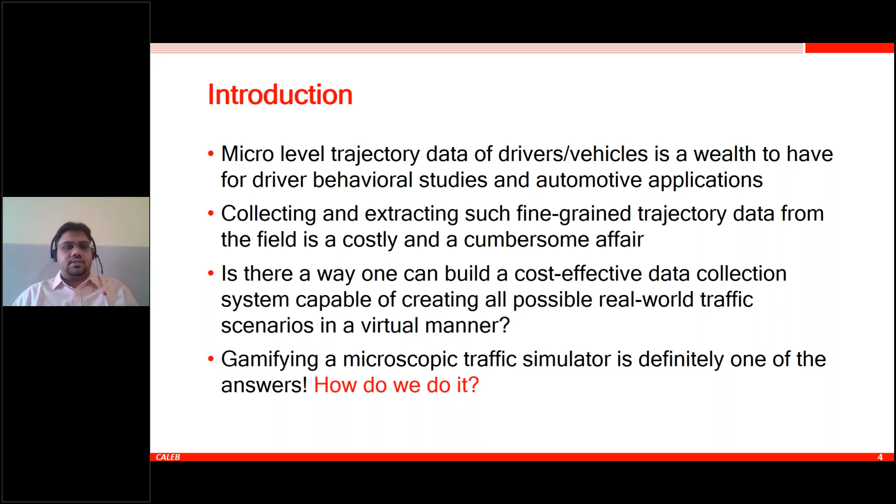For example, in our case today, we are specifically talking about PTV Vissim, which is a good traffic simulator that can represent most of the traffic scenarios in various regions. So with this as the introduction, let me now get into the core part of it. So the basic idea is simple.

When we have a traffic simulator like PTV Vissim, most of the time you can run the simulations, test out various traffic management strategies and signal control strategies, and then come to an understanding of how good those management strategies are.

But the point here is, when an external driver would like to jump into the traffic simulation that we are running, that is not an option that we normally have. But if we want to have the driver in the loop, then we need an interface that can toggle the information, or have the information exchange between the driver and the simulation environment that we are running.

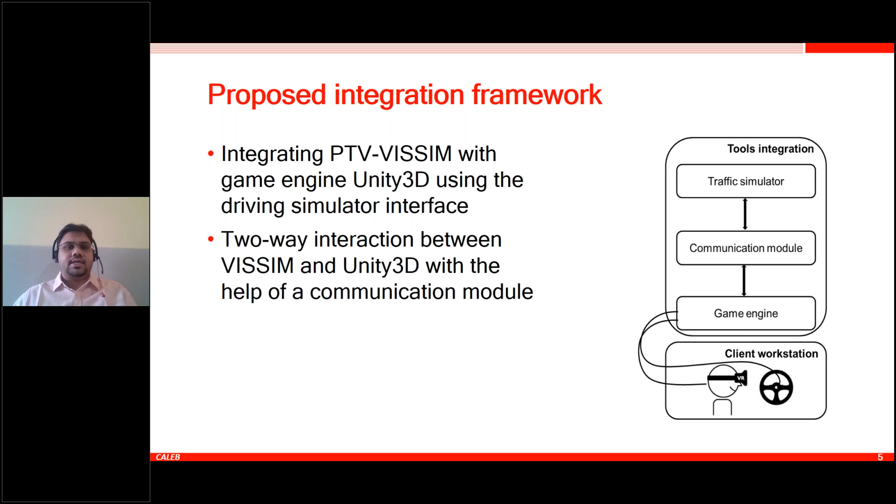Going to the more fine-grained implementation details, this is exactly what we do. We have VISSIM, which is the microscopic traffic simulator. We start VISSIM, and if VISSIM is running, we import the layout that has been created in VISSIM. The layout could be the roadways that you have put in the simulation model you built, the traffic signals you have created, and all the static and dynamic elements that you see on the roadway.

Then we take that layout and create the same layout in the game engine Unity3D. Then we have the external vehicle, which is the driver who is external to the simulation environment. We send that vehicle data, which is external to the VISSIM traffic simulator, to VISSIM. This data is combined with the traffic data already being generated in VISSIM. Then we take both pieces of information and adjust the vehicles as per the data we got from both the Unity game engine and the VISSIM traffic simulator.

Then we have the user input given by the driver who is driving using such a platform. We take that road user's input, update the user's vehicle position, and take that information to VISSIM. Similarly, the information on vehicles controlled by the VISSIM simulator can be taken and put into Unity. So in essence, this flowchart says there is an information exchange happening between the game engine and the VISSIM traffic simulator.

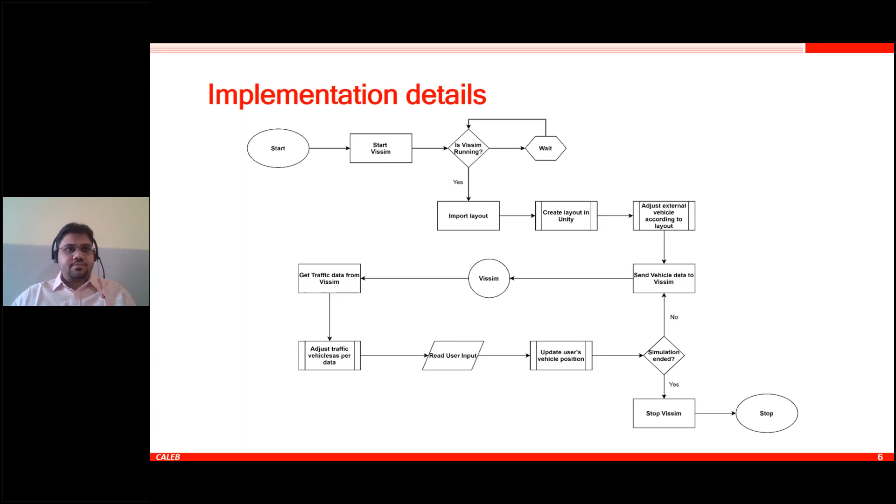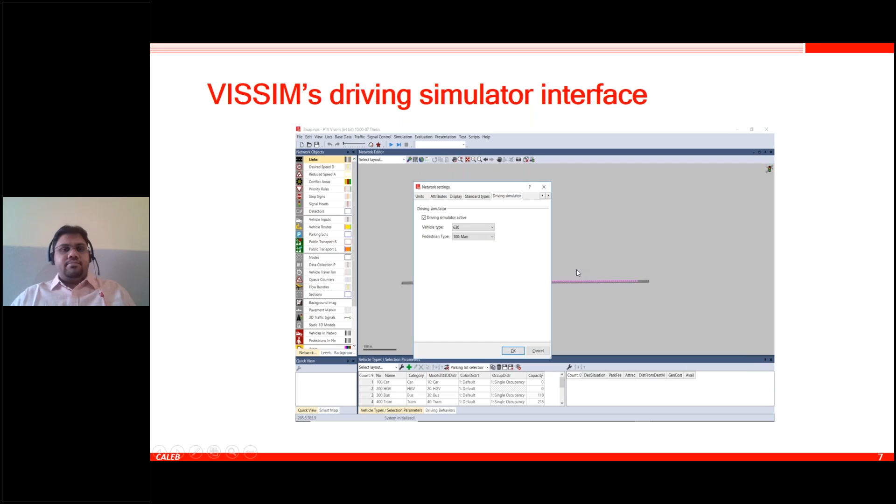Going into further details, this is where you can see how to enable the driving simulator interface. You need to go to the network settings and enable "driving simulator active". After that, what I'm showing here are some pieces of code that we have written in Unity using C#, trying to interact with Vissim's driving simulator DLL. That is what this piece of code is showing.

It is basically trying to connect Unity with Vissim's driving simulator DLL that is already available. And if people would like to know how this can be done, in some of the Vissim example files you will be able to see how this can be done.

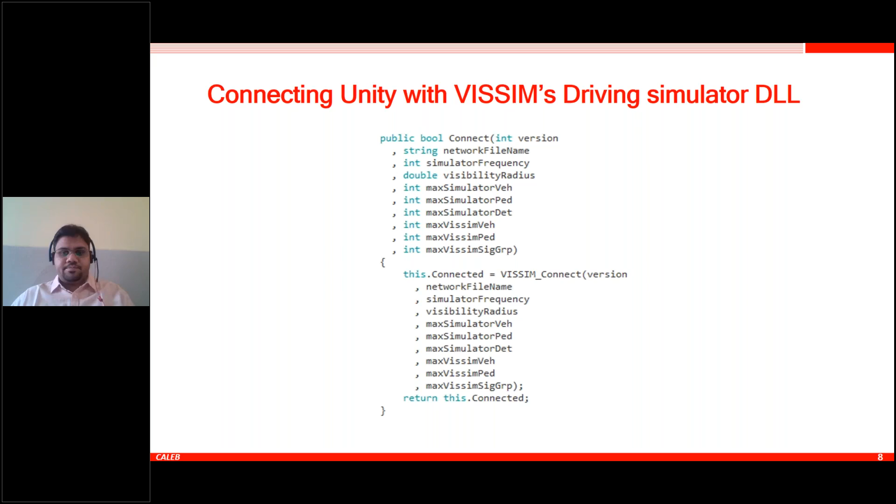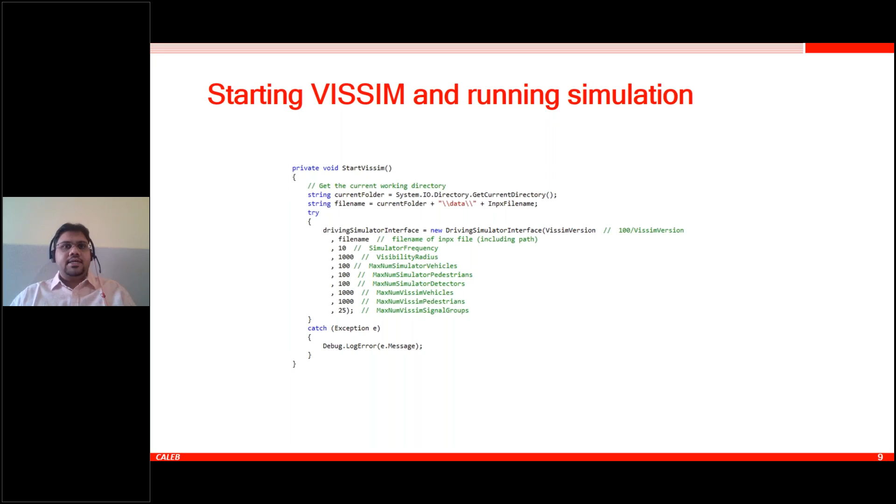Then the second step is, once we have established the connection between Vissim and the Unity game engine, then we need to really start Vissim and then start running the simulation. So this piece of code is basically saying here how to start Vissim. Basically, that involves going to the traffic simulation model that we have built, which will be an INPX file that would normally get created out of Vissim when we are building a model, and then take that into account and then start running the simulation.

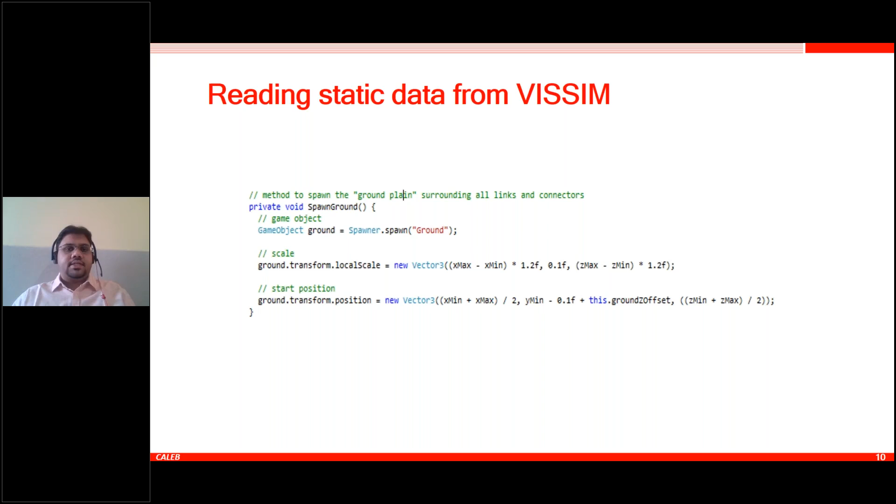Then the second part of it is basically, as I already told, we need to read the static data from Vissim. So this is where you will be able to see how we can translate the elements that we have created in Vissim as 3D objects in Unity. So it will basically spawn different objects that we have created in the simulator, and then it will be showing up in the Unity 3D interface that we are going to show to the external driver.

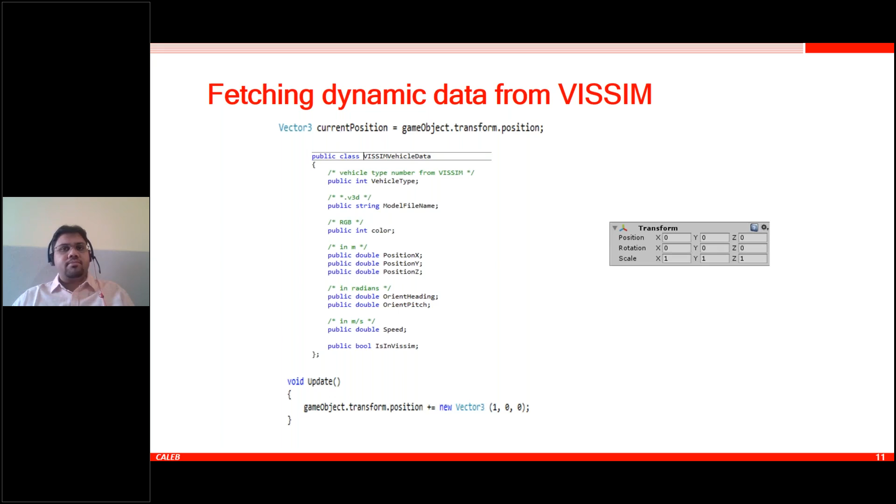Then similarly, as much as static data is important, dynamic data is also very important, in terms of the road surface, the road texture, in terms of the vehicle's positions, and so on and so forth. So this is what I'm showing here on the right side. Normally the positions of the vehicle and the rotation and the scale at which we are projecting these objects can also be taken from the Vissim simulator, and then it can be shown in the game engine.

Then we have a very important part where we want to translate the client's actions, whatever he or she is doing using the Unity interface, and then read that as the input and then take that input back to the Vissim simulator. This is important because at the end of the day, both these pieces of software or the tools have to talk to each other and then get information promptly and correctly, so that there is no mismatch between the environment that we are showing in the Unity interface and the environment that is being simulated by Vissim. Both should be in unison.

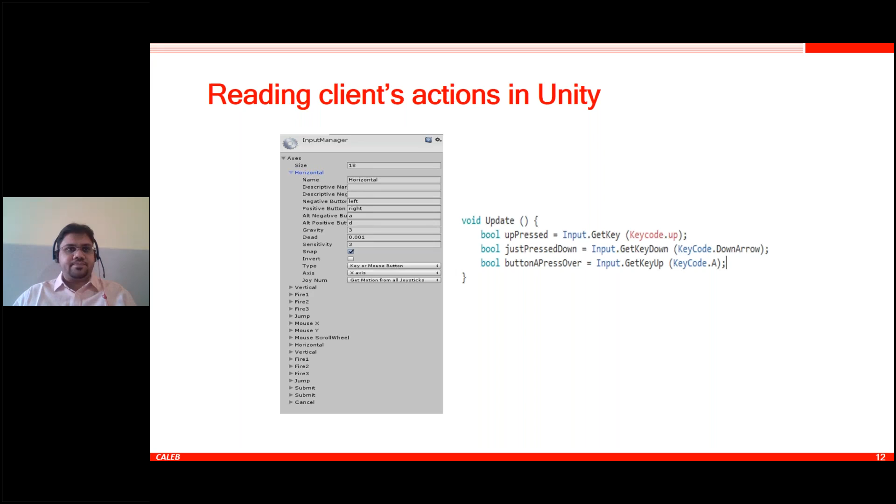Then this is what exactly I was talking about. This two-way communication module that we had to build between Vissim and Unity is the heart of this whole project, I would say, which basically is trying to, again, I'm reiterating the fact that the data has to be exchanged promptly and correctly between both the pieces of the software. And that is where this driving simulator interface would really help us to make this exchange of information happen for us. It can include the vehicle data.

If you are seeing here in the piece of the code, you can see the vehicle data being transferred between both the software tools. Then it will also exchange the pedestrian data. Then the signal data or the state of the signals can also be exchanged between both the tools.

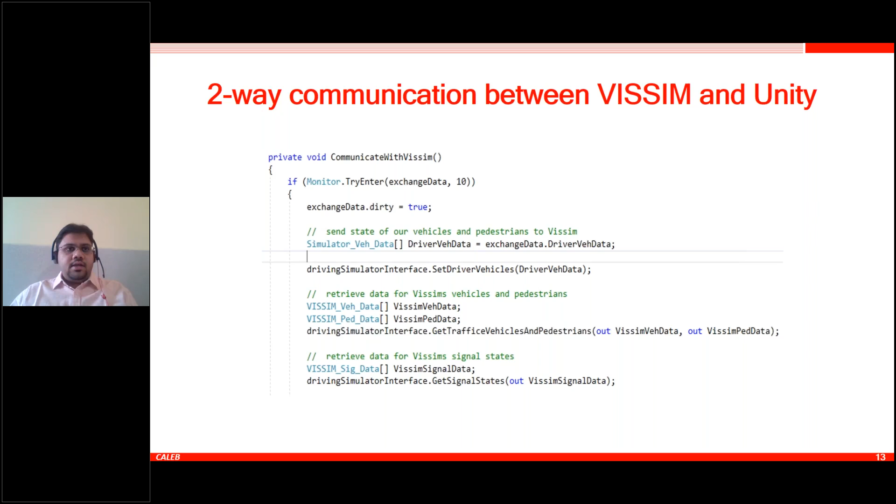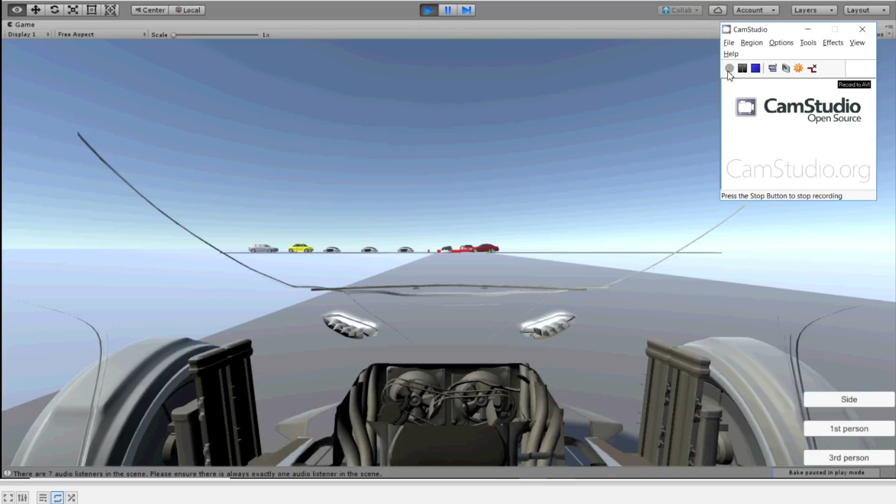Let me know if you are able to see the video. Yes, it's showing now. Yes.

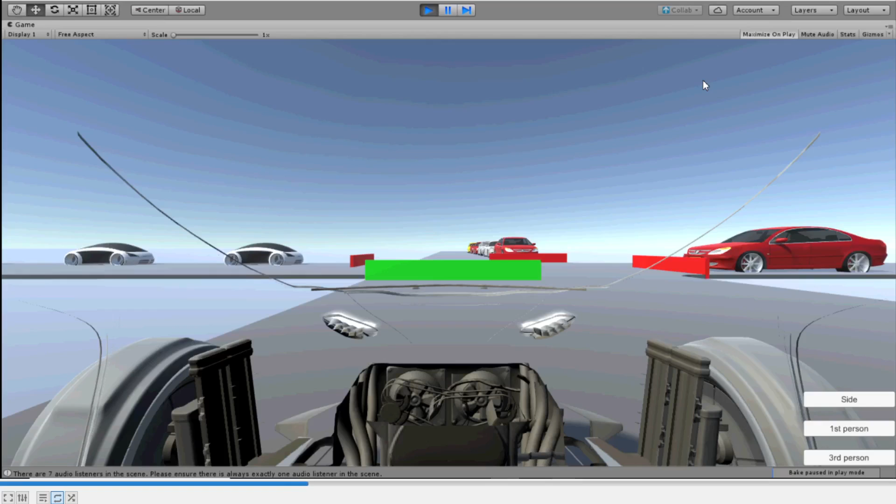Yeah, this is how the vehicle is moving. This is the external driver vehicle that is moving. And this is how you are seeing the vehicles in VISSIM. And then again, I'm coming back to Unity 3D, where there is a vehicle movement that is happening by the external driver.

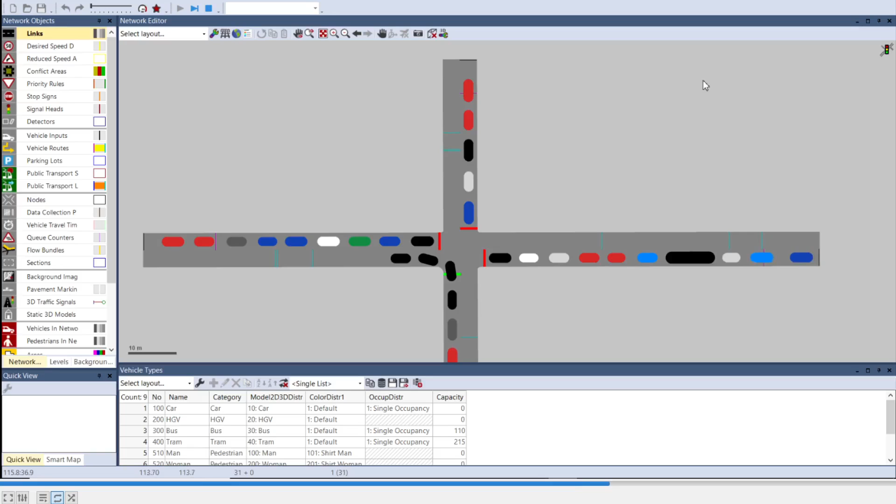And the same you can see here, where this vehicle has moved from the intersection and then it has stopped. Because it has stopped, the VISSIM vehicles are also reacting to the actions of the driver, who is external to the VISSIM environment. Now again, the external driver has moved. You can always see that movement again happening in VISSIM. Yes, now if you see, the vehicle has moved, and then all the other vehicles are also reacting to it.

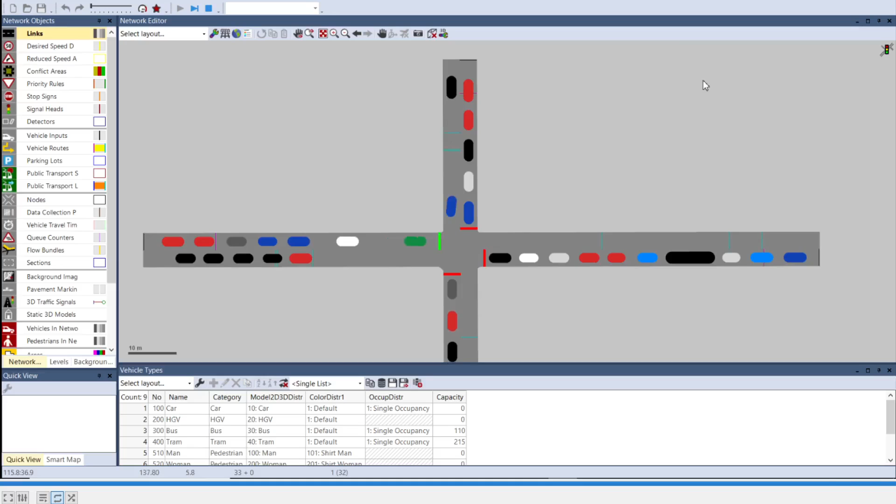Yeah, I will play the second video as well, in which you can actually see a real driver interacting with the game engine using the pedals as well as the steering wheel.

Are you able to see the video playing? No. Hello, I am actually playing it, but it's not showing. No, it's not. Now it's showing.

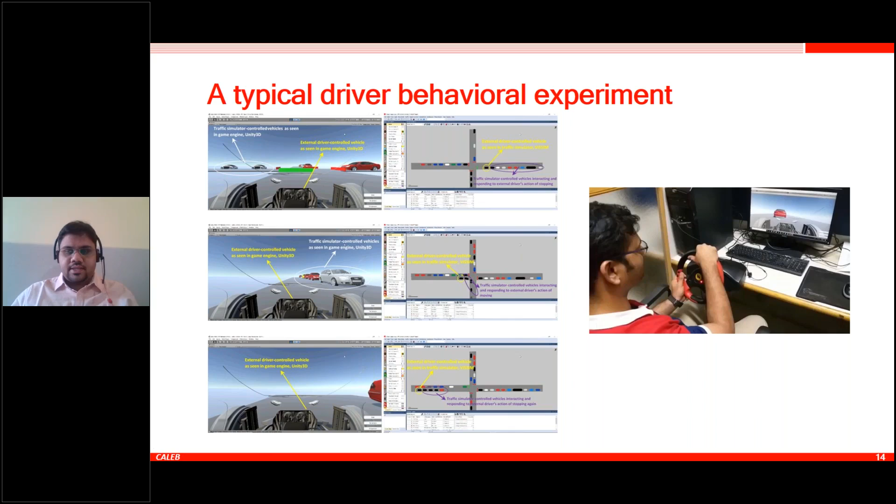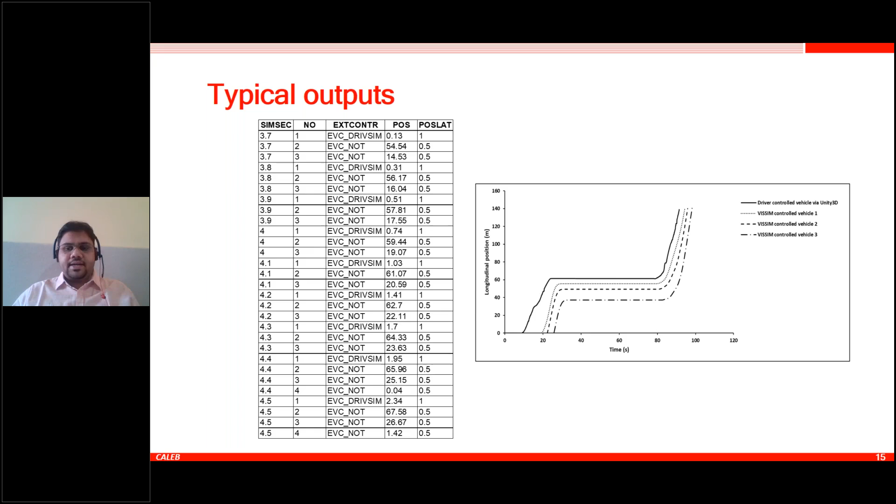Just to show how this data can be used to plot the trajectories of the vehicles, I have given an example here on the right side. All the dotted lines are the VISSIM controlled vehicles, and the solid line trajectory is of the vehicle or the driver who is external to the VISSIM traffic simulator, who is interacting using the game engine. So now we can generate such data with different drivers, with different experiments, and so on.

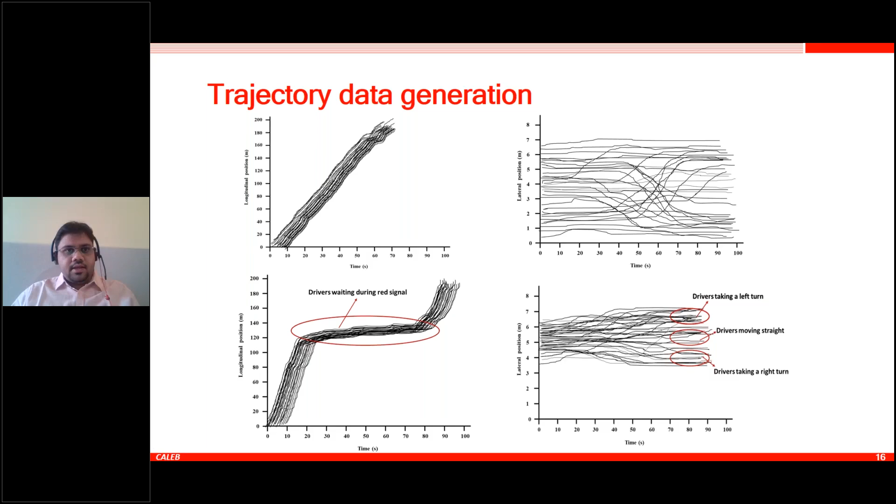Using such data, we have actually done some analysis to understand the driver behavioral aspects. The first and foremost thing that normally people would be interested in is understanding the reaction times of the drivers. So there is a small methodology that we have followed here to extract the reaction time out of the trajectories that we got. Basically, if you look at the parameter reaction time, it's a latent variable. Most of the time it is unobservable, and it's very difficult to extract such reaction time in the real field, even after getting the trajectories, right?

So the assumption basically is, which is a valid assumption, that the acceleration of a driver would be in response to the relative speed between his or her vehicle and the vehicle which is in front of it. Basically a basic car following model, or the car following theory, that a particular action of the following vehicle would be in response to the speed of that particular vehicle and the vehicle which is in front of him or her, which is basically the leader vehicle. So after taking up some reaction time, the reaction can be observed in terms of how much acceleration or deceleration a particular driver has done.

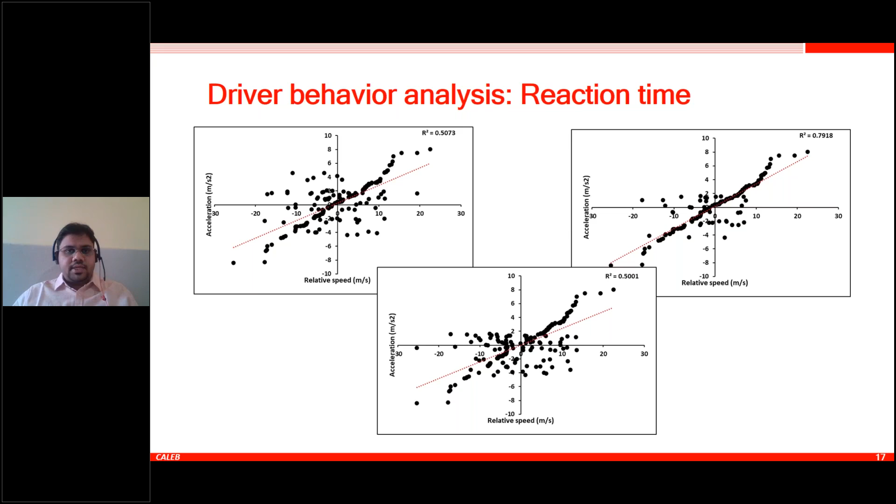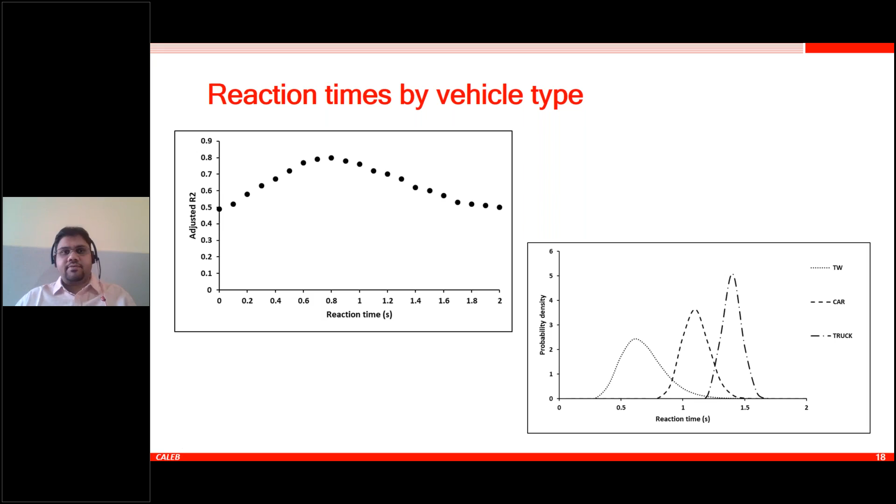But as the vehicle sizes increase, because of the constraints that come with the dynamic and static characteristics of the vehicles, the spread becomes lesser and lesser. That's what is clearly shown in this plot for the two-wheeler drivers, car drivers, and truck drivers. The second and third parameters we took into account are the space headways and time to collision. The same story repeats: the headways normally followed by two-wheelers are less compared to cars and trucks, but the spread of space headways is much higher in two-wheeler drivers. Similarly, for time to collision, the same story repeats.

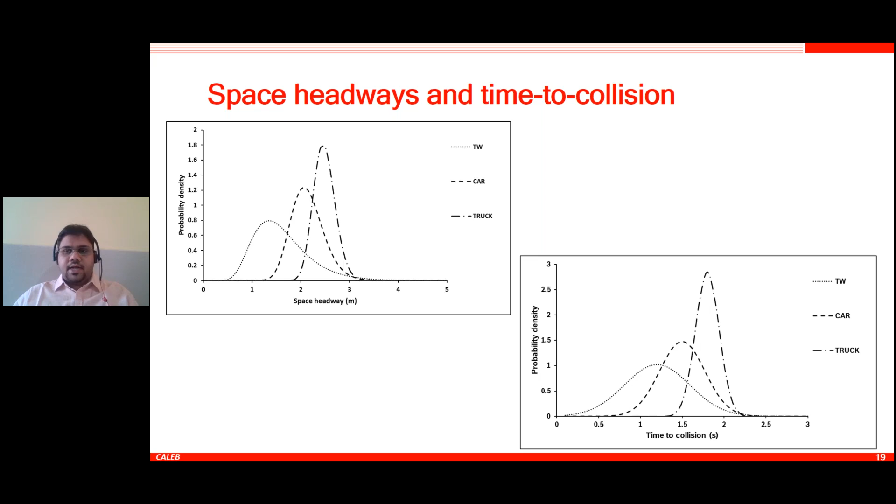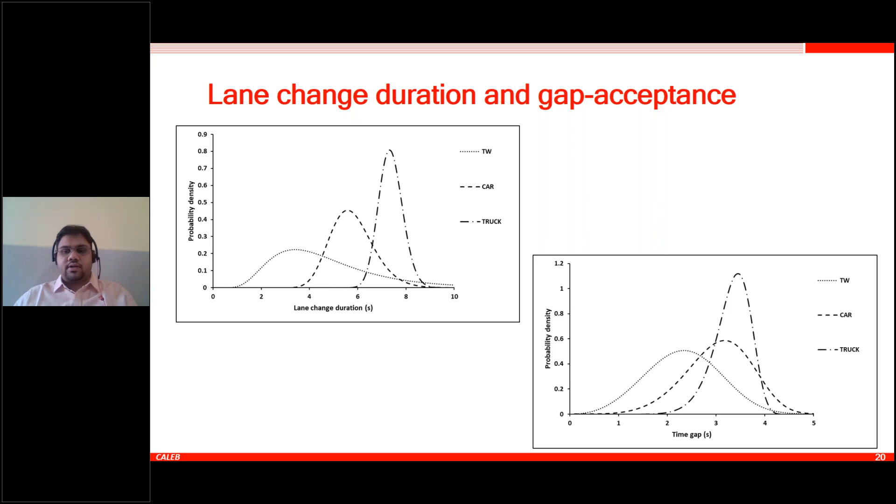But all across these parameters, we can clearly see that the null hypothesis got rejected, so to say, which is telling us to go to an inference that yes, definitely there is a very strong effect of the vehicle type on the driving behaviors all across the parameters that we have taken here and analyzed.

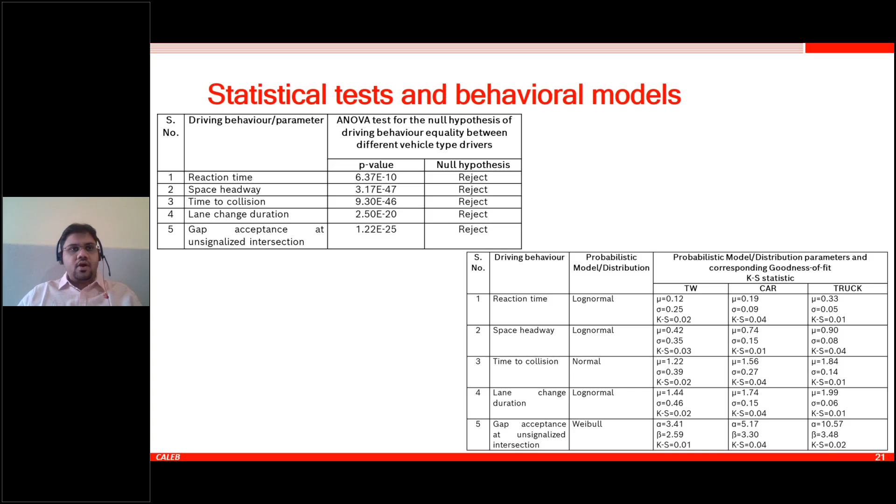Now, beyond driving behavioral modeling and the analysis that we can do, there is something else that we can also do, especially in terms of the automotive applications. So we know that sometime in the future we will be hitting a point where we see all autonomous vehicles plying on the roads. And there are different other aspects which are very important for autonomous vehicles, starting from perception that has to be there for an autonomous vehicle.

Then they need to get that information out of those perception algorithms. Then they take those algorithms and start making the autonomous vehicle understand the surrounding environment and then do the actions by itself in terms of whether to accelerate, decelerate, if it has to accelerate, how much to accelerate, if it has to decelerate, how much to decelerate, whether it has to take a decision to change to the other lane, whether it has to avoid the collision, and so on and so forth.

So in essence, what we can say is an autonomous vehicle is no more than a virtual human being. So if the autonomous vehicle has a brain, which a normal human being has, then the autonomous vehicle can itself drive. That is what we normally call path planning by an autonomous vehicle. And as I have already said, the autonomous vehicle is no more than a virtual human being, so we come to a logical conclusion that autonomous vehicles can always learn from real human drivers how to drive by themselves. So that is where we can take these trajectories that we have generated out of drivers in that particular environment.

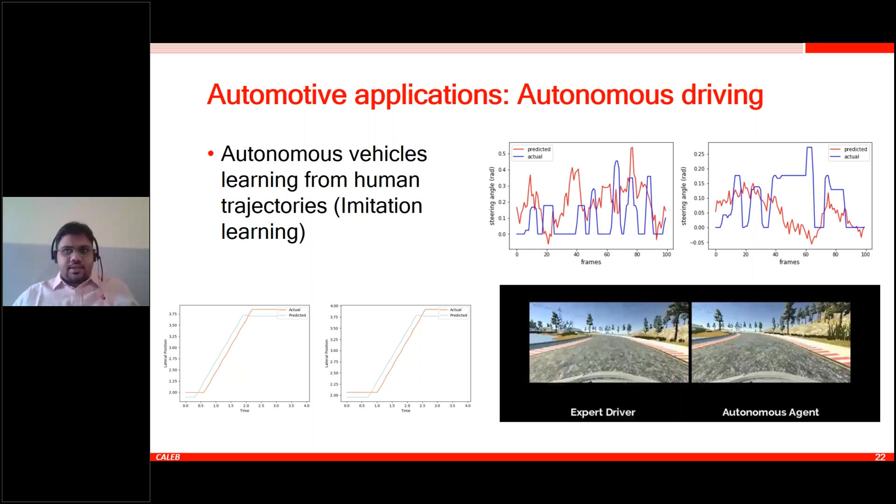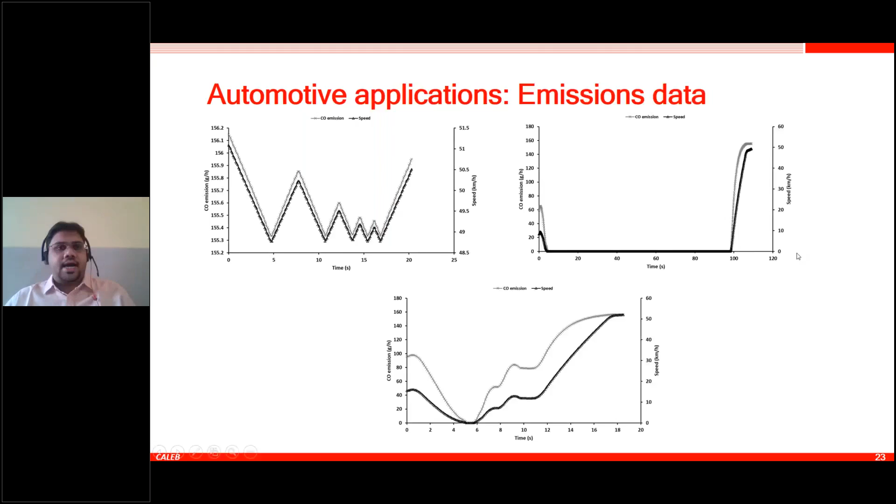Okay, finally, to conclude, we can say that the driving simulator interface in PTV Vissim definitely provides a nice opportunity for developing one's own driving or vehicle data generation platform. As we have seen with the different applications I have shown, such data generation platforms will be useful for conducting driver behavioral studies and developing automotive applications.

As far as our experience is concerned, the platform developed in the present study definitely helped us quite a lot in understanding driver behavioral aspects, and going beyond traditional driver behavioral modeling, we can also use such models or the data from that platform to develop automotive applications. Yeah, so I think this is all I have to say as far as the presentation is concerned.